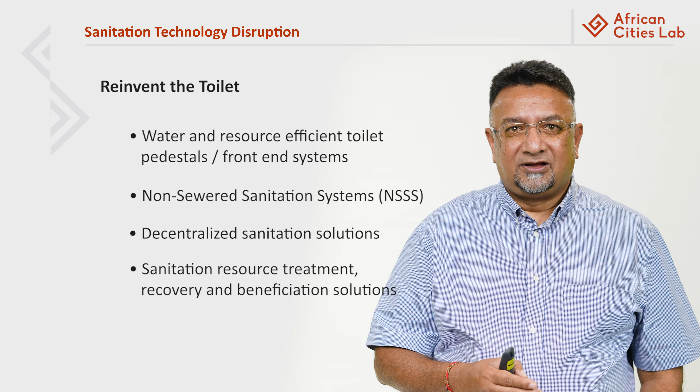water and resource efficient toilet pedestals or the front end systems. It's about developing sanitation technology that is non-sewered and off the grid. It's about developing sanitation solutions that are decentralized. It's about developing sanitation technology that generates resources that recover and beneficiate valuable products as outputs.

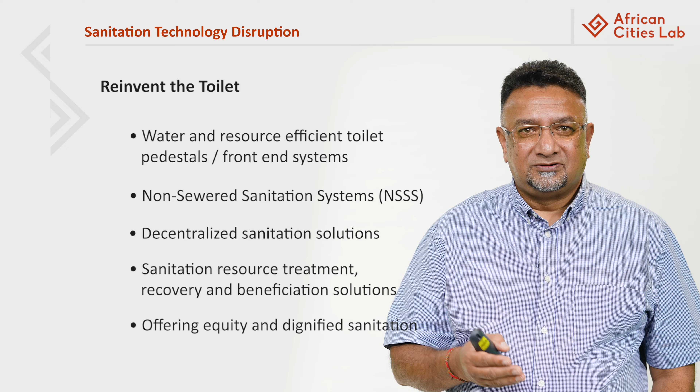This approach has the opportunity, which we talked about in the new sanitation model, that can stimulate a new circular economy and offer greater equity and dignified sanitation to everyone in this world.

So let us look at these new evolving non-sewered technology processes emerging out of this Reinvent the Toilet investment. There are four main leading processes that we see in the solution space.

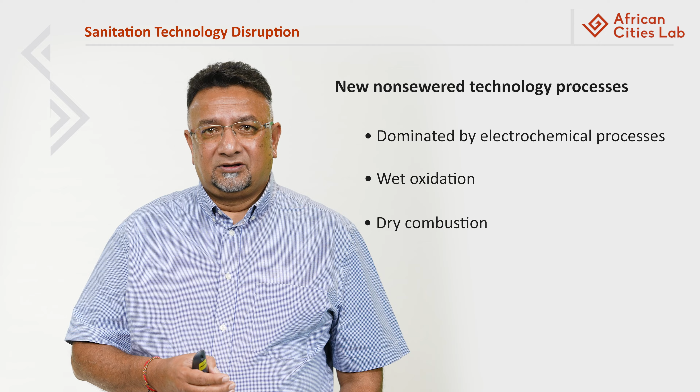These are dominated by electrochemical processes. The second batch of solutions are related to wet oxidation. The third is related to a suite of technologies around dry combustion. And the fourth is looking at smart biological processes which incorporate modern membrane systems in their processes.

In layman's terms, these technologies use incineration, high pressure in the forms of pyrolysis and carbonization, and gasification as well.

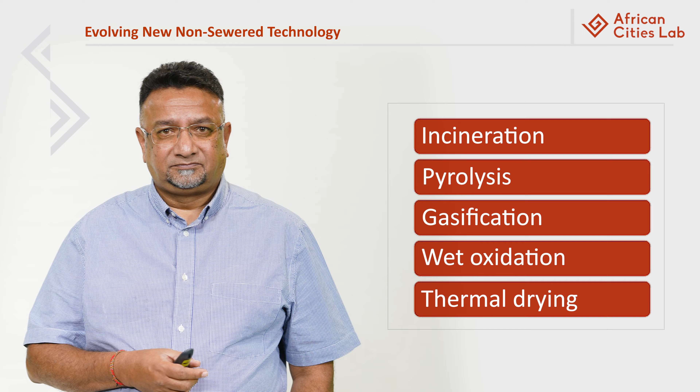Now I will share with you the kind of innovations that are emerging, and at first we will look at the front-end systems. The front-end systems play a very big part on the size and efficiency of the back end. The back end, as we call it, is the reactor and depends on the energy requirement.

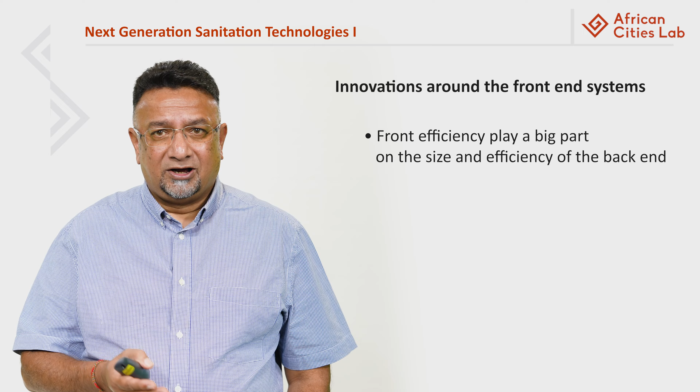So the smaller the input volumes from the front end, the smaller the reactor in the back end, and thus the smaller the amount of energy required in these processes.

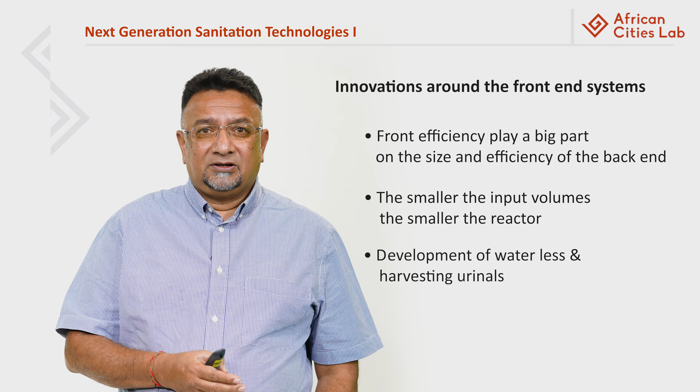What we are seeing is the development of new waterless solutions or water efficient solutions, as well as front-end pedestals that are able to harvest human resources in the form of separating urine and feces, but also urinals for women that offer harvesting of urine as the resource.

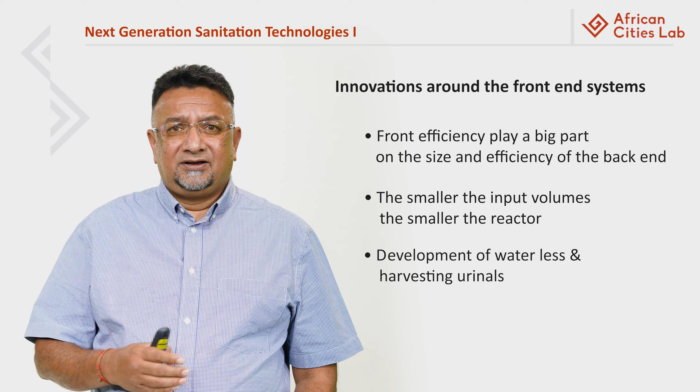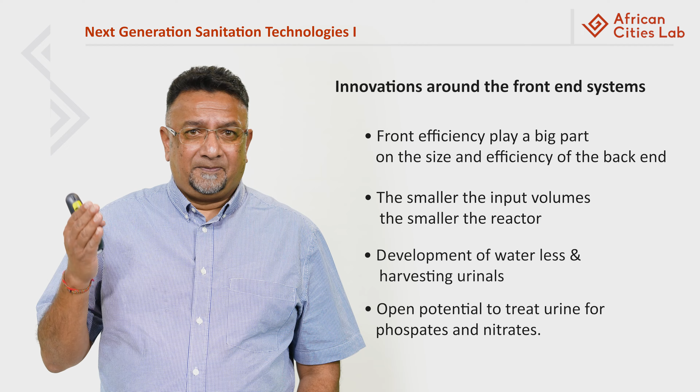What this does is open the potential to treat these resources to recover from urine valuable products like phosphates and nitrates. And in the solid matter of feces, you're able to harvest gas, fuel, as well as a number of other soil remediation products. What we start seeing is the advent of these low and microflush toilets.

These are already in the market, and we're starting to see them pushing the barriers of the volumes of flushing. We're seeing the evolution of between 1 to 5 liter flush volumes. And recently, we've also come across a system that uses 300 milliliters of water to flush.

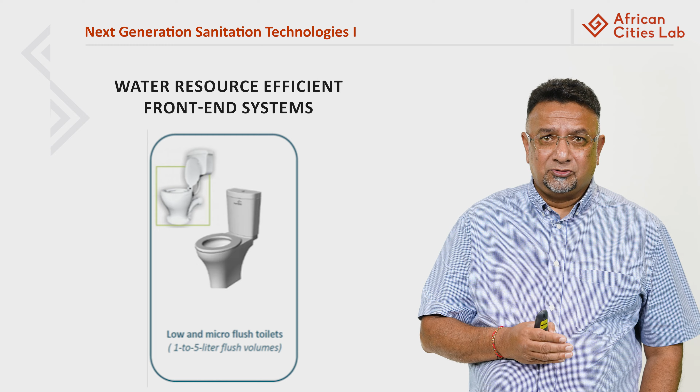But we're also seeing more low energy systems like suction and vacuum systems that allow this displacement of human waste from the front end to the back end.

We're also seeing toilet pedestals that minimize leaks, that conserve water emerging, as well as pedestals that offer grey water reuse for flushing and hand washing.

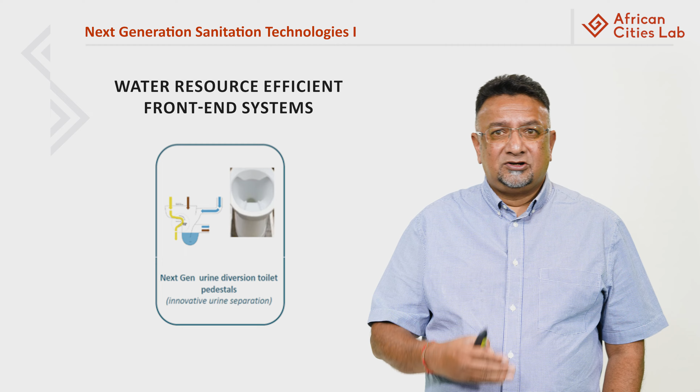And then the more state-of-the-art new pedestals, as I mentioned, allow for smart separation of urine and feces without creating large amounts of inconvenience to the user. And as mentioned, this creates the opportunity to keep pushing the barrier to make the back end smaller and more efficient toward this aspiration of an appliance.

Now we move to the next suite of emerging new generation sanitation technology, which offers this opportunity toward this resource efficient pathway. We first look at community level treatment systems that deal with black water.

And when I say community level, this is a non-sewered sanitation system that allows communal sanitation ablution facilities, but also allows a number of households to be connected to one treatment unit or treatment facility.

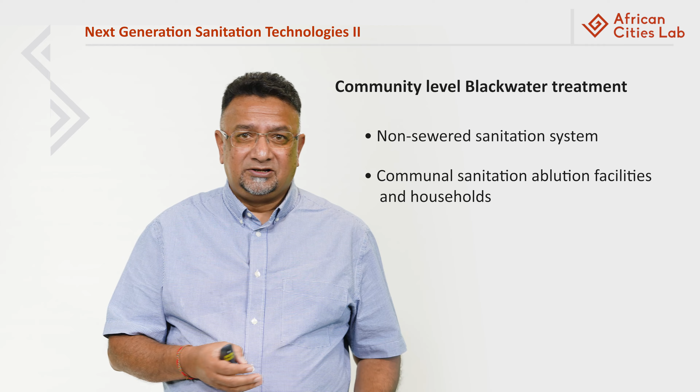It can take black water, which is treated safely, and the effluent component is either recycled for toilet flushing or put to beneficial application in the garden or other forms of activity.

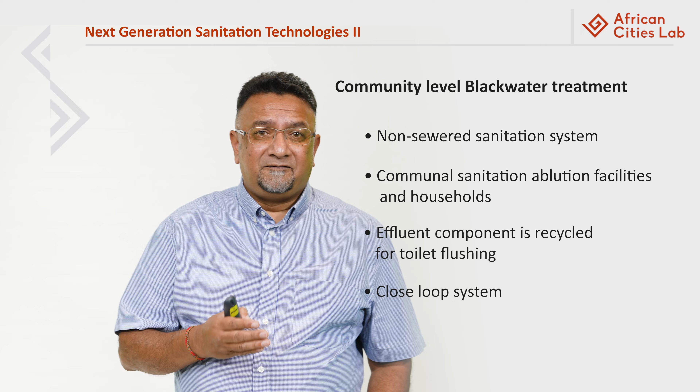So many of these systems are called closed loop systems, which is suitable in areas which have very limited water supply, as well as in areas that are very, very remote and do not have access to continuous water supply.

And once you fill these systems with water, you do not need a formal water supply to keep using it. It keeps recycling the water for flushing and for use.

Okay, the next suite of innovations that we see targets individual households, and we call them individual household systems. And under this new generation of technologies that are emerging, one of them is the smart septic tank system in the form of the Aquanic liquid treatment tank.

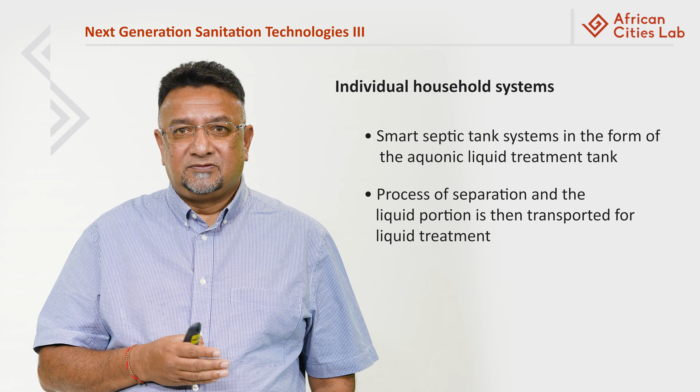The system allows black water to be treated through the septic tank and then goes through a process of separation, and the liquid portion is then transported for liquid treatment, and what you get out of it is a pathogen-free effluent that is readily available for recycling and flushing.

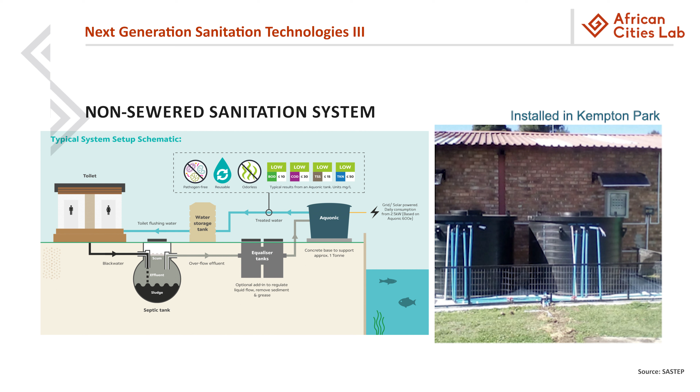So this is an example of a closed loop, very simple household system. And the system has the potential to be placed in areas that have huge water constraints or stresses, but allow this opportunity in the form of safe sanitation.

The next set of technology innovation is related to omniprocessors. Omniprocessors is a term used for systems that deal with sludges emerging from on-site dry sanitation systems like VIP toilets, the equivalents, as well as septic sludge systems and septage.

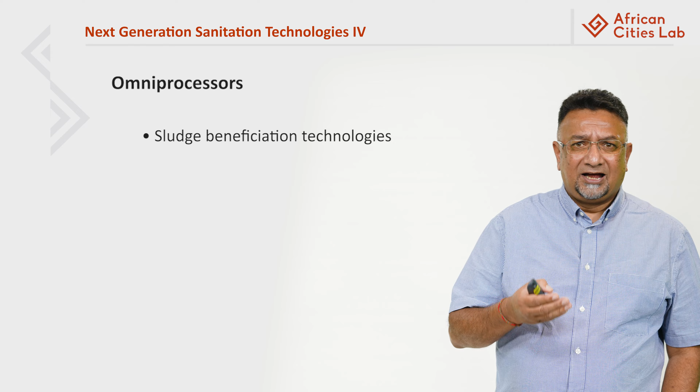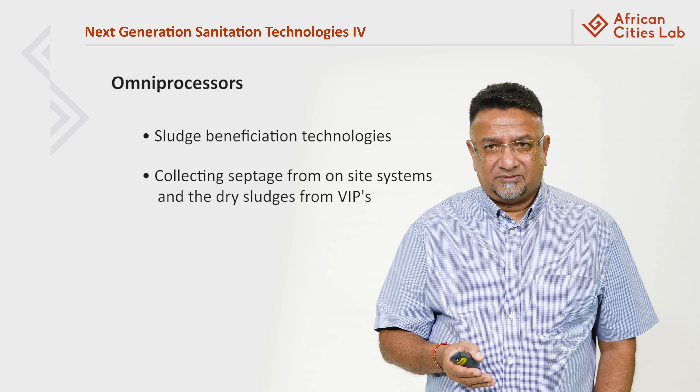And these systems are designed for sludge beneficiation and treatment. At present, with the solutions we are using, we have a challenge in collecting fecal and septic sludges from on-site systems. And we need to then safely treat these systems at some point before we put them in the environment.

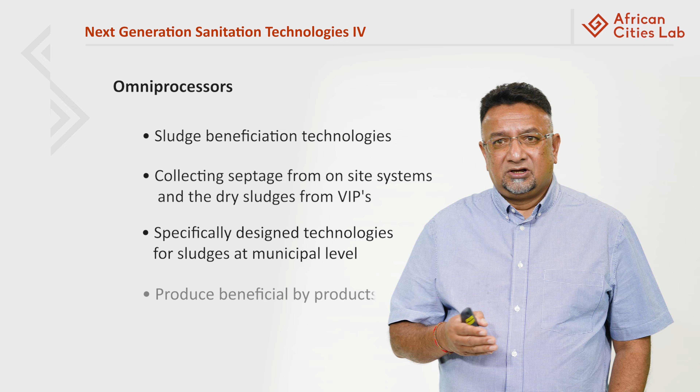So we see the suite of specifically designed technologies that deal with treating these sludges from these systems at a municipal level, and produce a whole lot of beneficial byproducts. Now, some of the examples are, for example, the LaDePa, the biogenic refineries, the advanced hydrothermal carbonization process, systems like the diamond reactor.

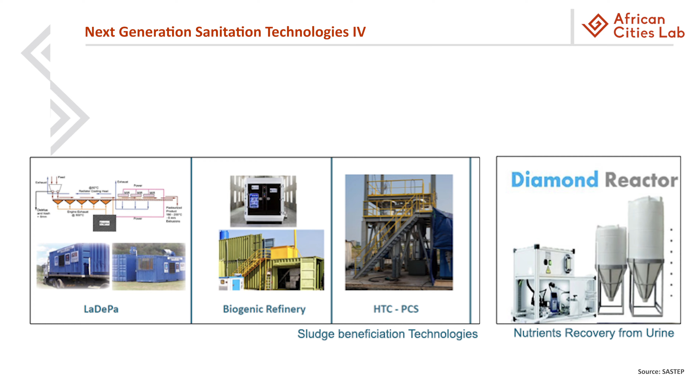These will be covered in much detail in Module 3. But the important thing about these solutions is that their processes lead to generating beneficial products in the form of water, energy, and nutrients.

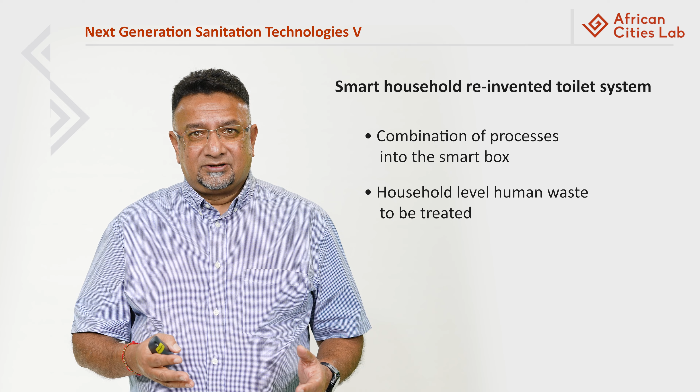And then we see a suite of emergence of the new smart household reinvent the toilet systems that take a combination of several of these processes into a smart box and allow at a household level human waste to be treated. Now we see the development of these in a variety of settings.

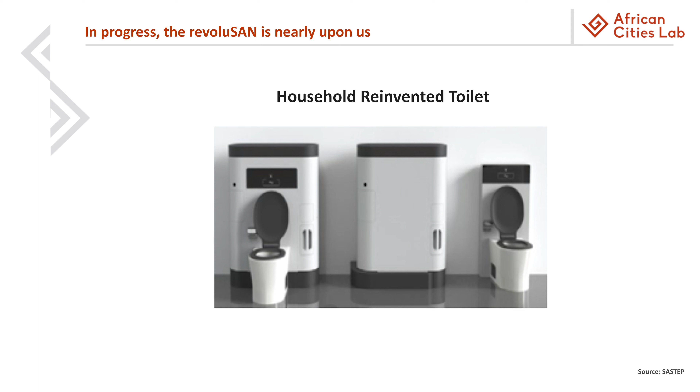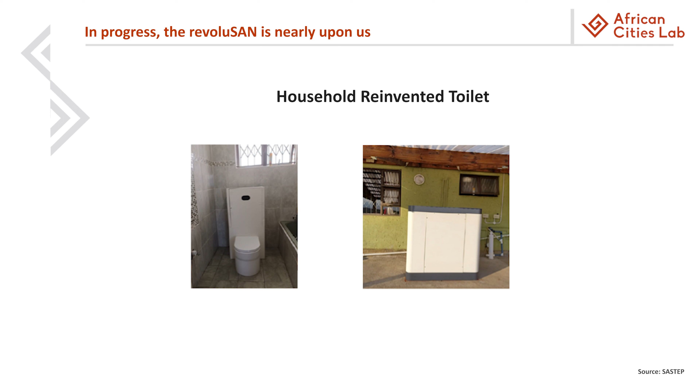And what is presented on the slide is the second generation reinvent toilet systems, which are moving in the direction of being an appliance, and this is quite transformative.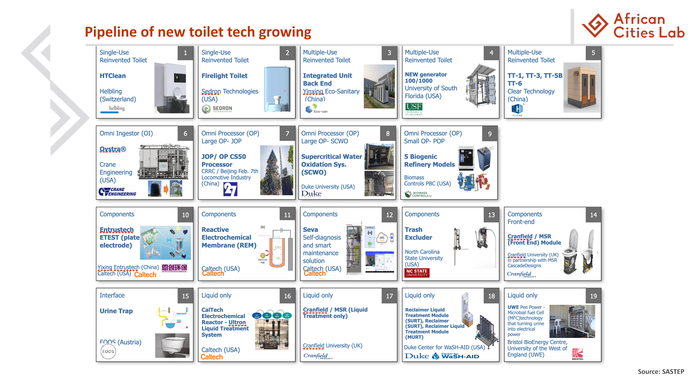We are seeing big industries like Samsung, etc., developing the first prototypes, and offering the pathway and ambition for new innovation through the pipeline. This new pathway and ambition has spurred a whole new innovation industry, and several products are in the pipeline. We're starting to see several innovations and products at different levels of planning and manufacturing, as well as seeing the reinvent the toilet paradigm taking off.